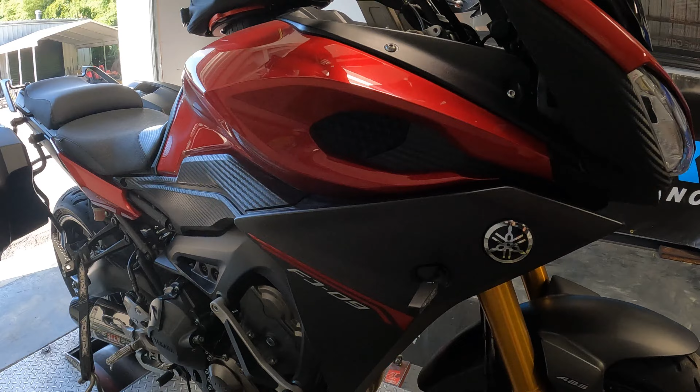Now they make a bike pretty much just like this now, the MT-09 Tracer GT. Pretty much the same thing, but for a little while they called it the FJ-09 in the United States. And we are going to be doing one of these things today. The customer is complaining of some on-off throttle. He's like, man, when I ride it and go into a turn, it's terrible because I can't maintain speed or ride it and feel safe.

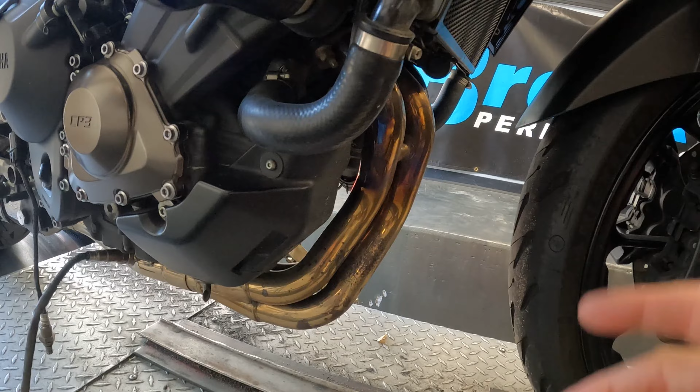So anyways, this thing has got a Yoshimura full exhaust system on it. We're gonna be flashing the ECU, taking the restrictions out, getting the bike to make more power. Not only that, we're gonna make it ride way smoother and do all the sport touring things you're gonna do with this bike, better. Stay with us guys, here we go.

FJ-09 all warmed up. We're about to make a pull on it for the first time to see what kind of power this thing makes. Then we're gonna flash the ECU, remove all the restrictions, smooth this thing out, and see what kind of power gains we get from doing that.

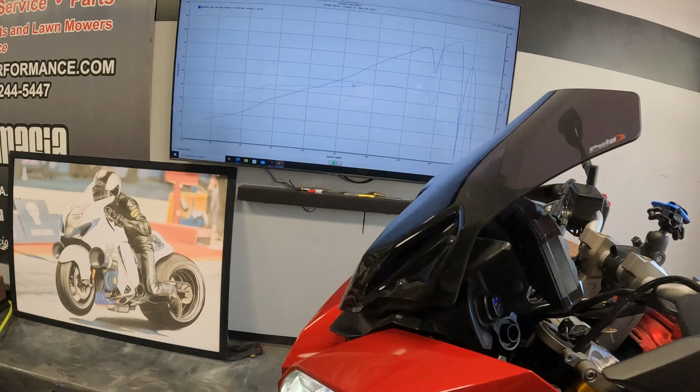So you just saw the first dyno pull. The thing was acting kind of wonky, and I'm like, what in the world? This is the first one of these I've done on the dyno, the FJ-09. I've done tons of FZ-09s, tons of MT-09s, but the FJ-09 we never done one.

I'm like, what? Dyno in 5th gear, that's normal procedure, that's just where I dyno every bike at. Put it in 4th, went a little farther, but still did the same thing. Put it in 6th, and come to find out, it's the speed cut, guys. This thing has a top speed limiter. Watch this, I'm gonna put the bike in 6th gear. Take a look at the restrictions this thing has in 6th gear.

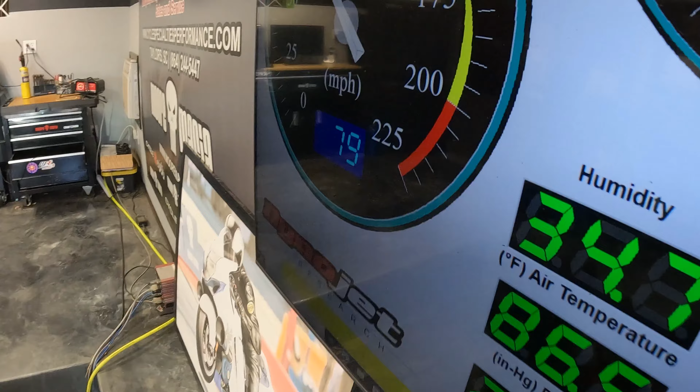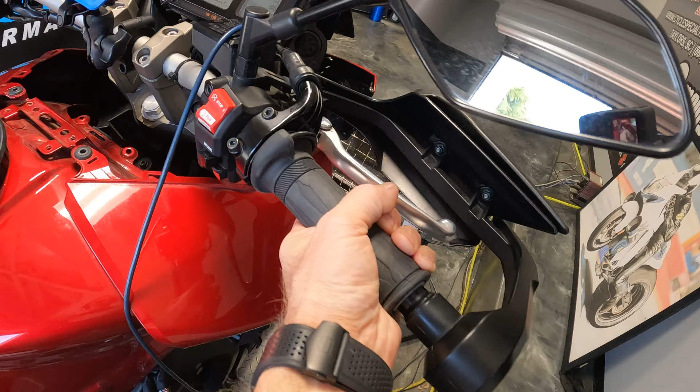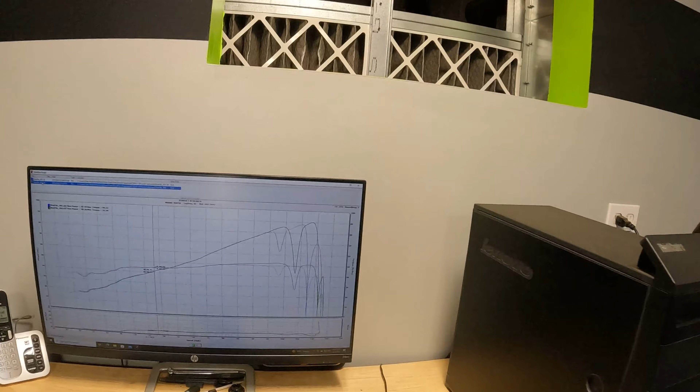So you can see we did the baseline pulls. This thing is basically speed limited, 110, 112, 113-ish miles per hour. No matter what gear, it actually hit the speed limiter in 4th gear, hit it in 5th gear, and of course hits it crazy early in 6th gear. We're gonna run this thing now that we have flashed the ECU and removed the restrictions. We're gonna see what this thing will get us now.

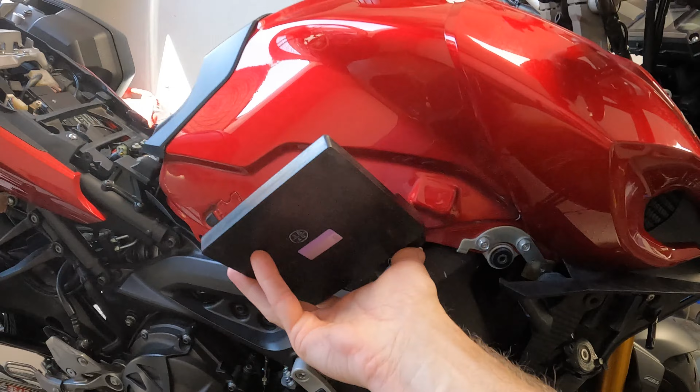Now, to get to the ECU is under the gas tank, okay? So if you want to look up a video on how to change or clean your air filter, if you get to the air filter, you're gonna see the ECU. You don't even actually have to go that far, the ECU is on top of the air box. But all I can think about is these restrictions, we gotta get rid of these. Let's see what this thing does now.

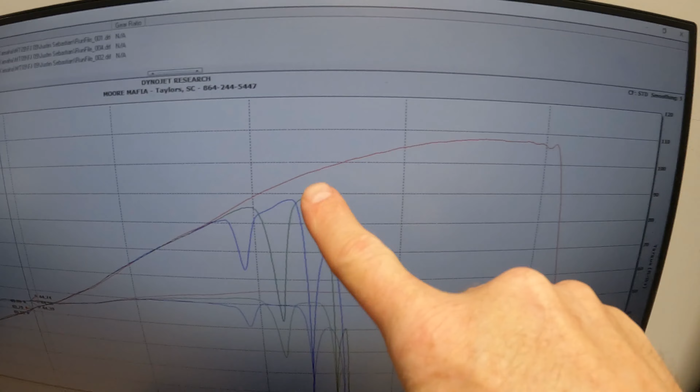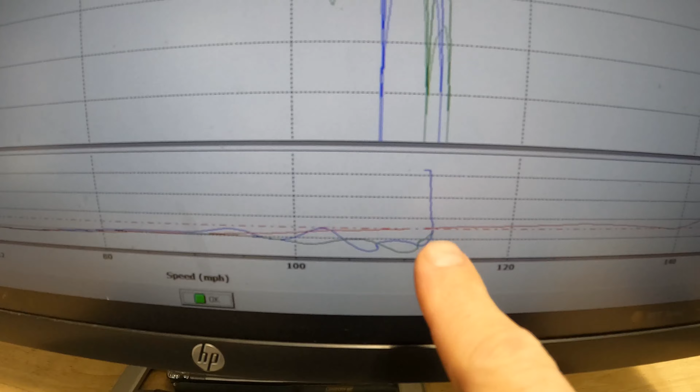Working off camera, getting all the restrictions out of this thing and getting the air-fuel ratio dialed in perfectly, this thing gained more top speed than almost any bike we've ever done. You're not gonna believe the top speed on this thing. Watch what happens when I dyno it in 6th gear this time.

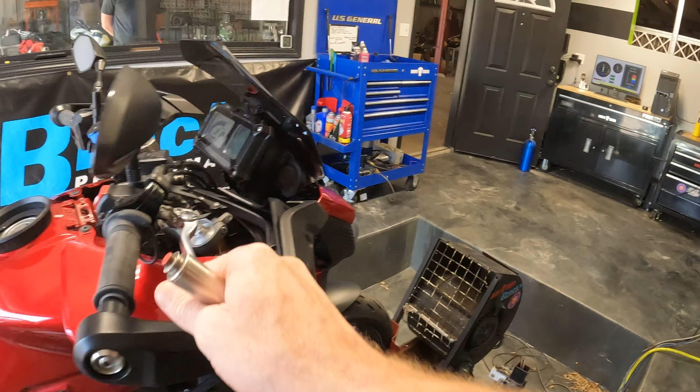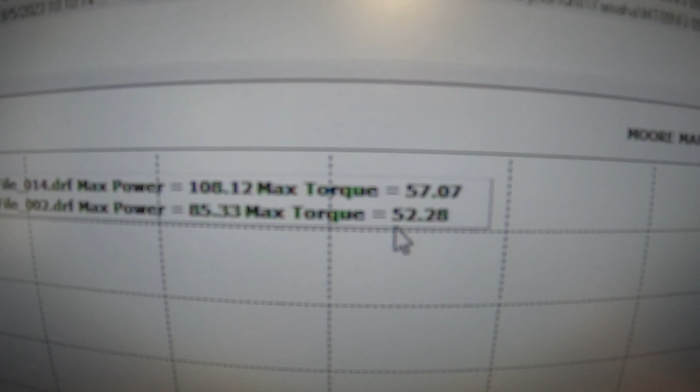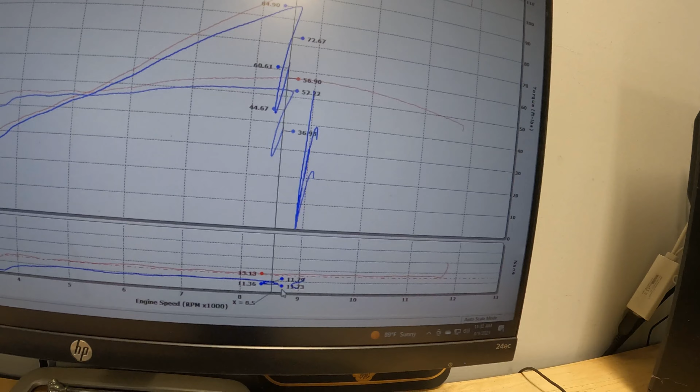Finished up with the tune. Take a look at the results: 108 horsepower, 57 foot-pounds of torque. We started off with 85 horsepower and 52 foot-pounds of torque. But the biggest thing is look at how this thing just falls on its face so early in 5th gear before. 8,500 RPMs is all we were able to achieve before. Now we're going all the way to 11,900 RPMs.

I never got a chance to tell you in the beginning of the video, but let me show you a little bit now about what's inside the ECUs and what is going on, why these things got you so restricted.

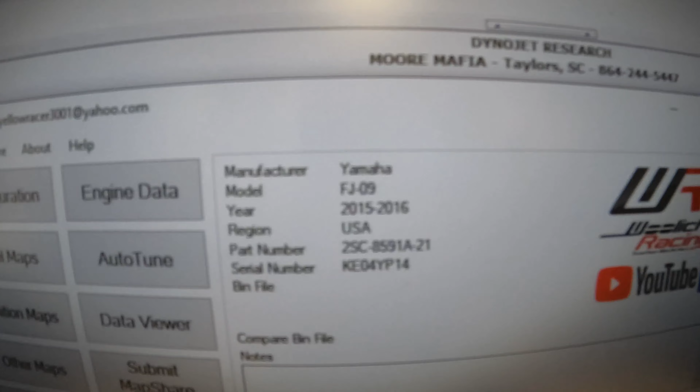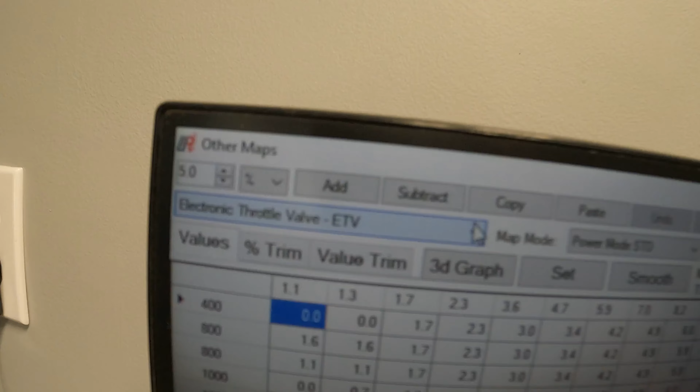So you can see we've opened up the file from a brand new, or a stock, FJ-09 ECU. We click on other maps here, and we see electronic throttle valve, then a different gear selector. Now you can see if we put it in 1st gear, we're getting pretty much 100% throttle everywhere, which is pretty good. Some new bikes don't even give you that, the throttle is very limited in 1st gear.

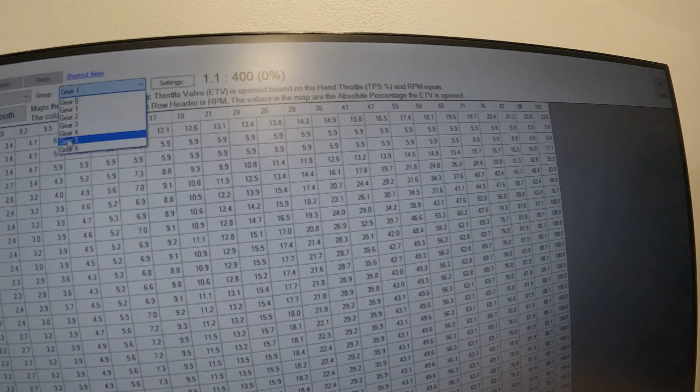So if we put the bike in 5th gear, which is where we dynoed it, lo and behold, you can see here at 10,300 RPMs, we're cut back to 70% throttle. So even though you're wide open, the bike is only giving 70% throttle.

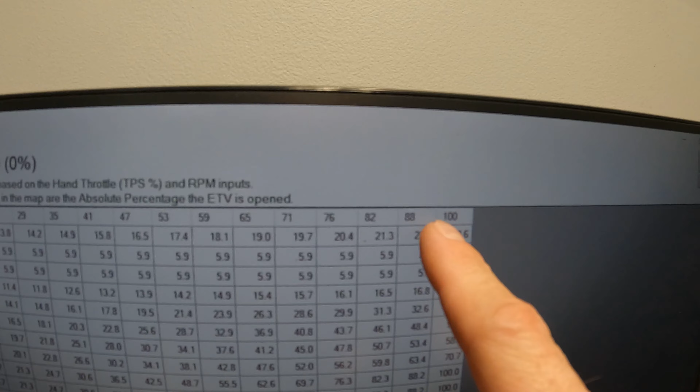So this table up here, I should have told you this to start with. This is your throttle percentage table, that's how much gas you're giving it. This over here is RPM. These numbers in here is how much the ECU is giving it. From the factory, this is in standard mode.

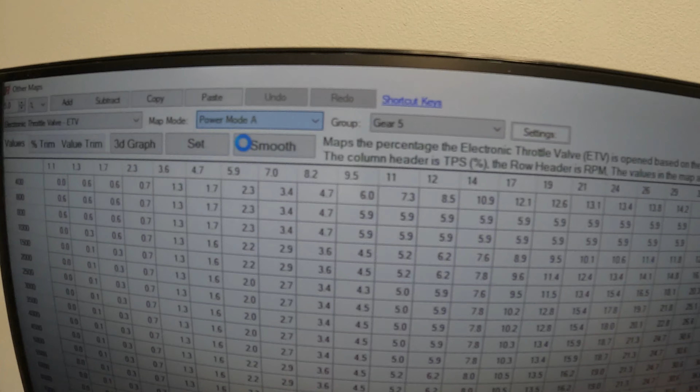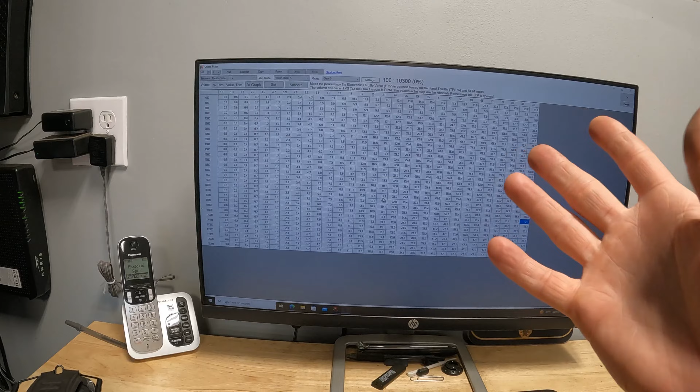Now if we put it in A mode, you can see pretty much the same restrictions, you just got bigger numbers in the middle here. So as you're easing into it, the ECU gives it more power in A mode than it does in standard mode. Well, we make A mode and standard mode the exact same.

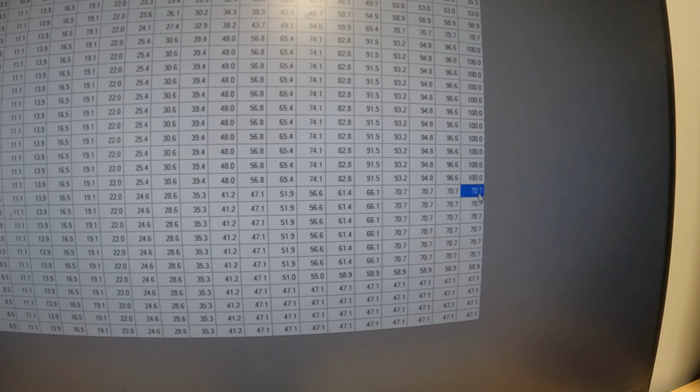But you can see at 11.3, the bike is back to 47% in the ECU, so it really chops it off. 6th gear, pretty much the same, but worse. You can see 6th gear, 8,900 RPM, we're back to 70% throttle.

That's killing our power. Not to mention that, we're gonna go in here to the advanced settings and drop our fan temps down. That's one thing the customer was complaining about. The fan, he said, didn't come on till 215, 218-ish, somewhere around in there. We got it coming on around 195 degrees.

Then we go in and disable the top speed limiter. We can default to A mode, so that way every time you start the bike up, it's automatically in A. You don't have to change it. Disable the pair valve so we don't get any decel popping.

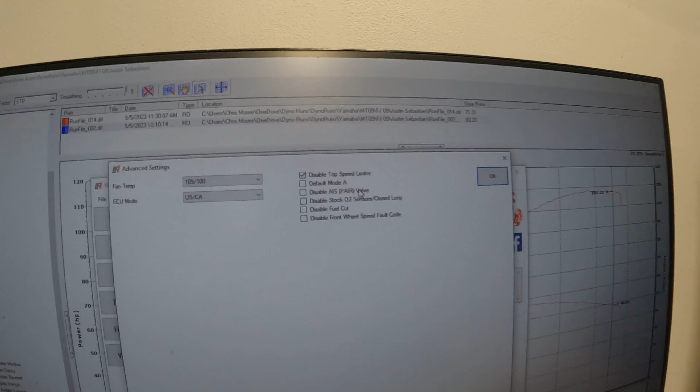We also disable the decel fuel cut. So you know when you're riding the bike, you're on the throttle and you go to let off just a little bit, boom, the thing falls on its face. If you're in a corner, it's definitely super scary. We can disable that feature, which keeps the fuel injectors running just a little bit while you are off the throttle.

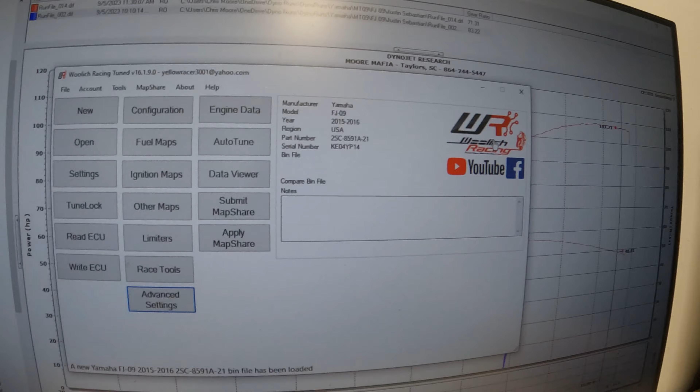Then we close off the pair valve. That basically recirculates the air in there. Anyways, long story short, when we disable that, it stops all the popping. We don't want any popping out of this thing. We want it to sound nice and clean, and that's what we've done.